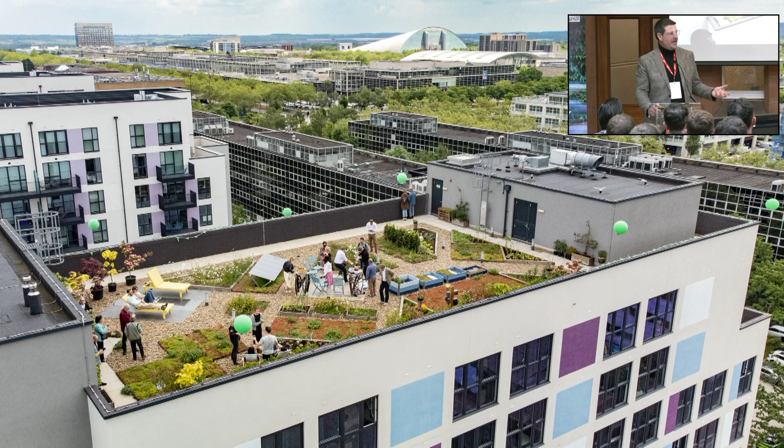In fact, in 2019, when we mapped the city centre, there's the equivalent of 6 full-size football pitches worth of space that could be greened overnight without structural enhancement. Now, that's a lot of green space when we're in a climate emergency and we need more green space. The challenge we have is bringing people on board and financing it.

So when we talk about living roofs, it is vegetation above a watertight roof surface. So if you can imagine a garden shed or a garage with a felt roof on it, that felt would still need to be there, but we're going to add some layers above it to create a green living roof. And that's really important because you still want the building to be watertight.

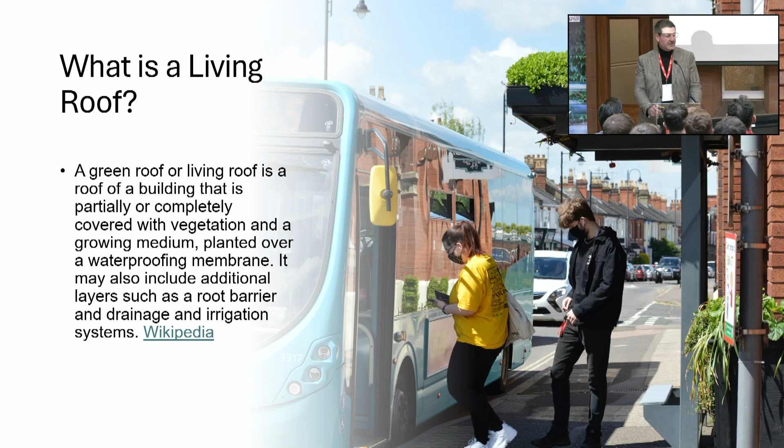Some people fear that a green roof is going to be ivy roots coming through their living room if it's on top of their house, which it's not. It is an additional layer to a surface that already exists. And it doesn't have to be big roofs, so anyone can feed into this. Anyone may resonate with some of the pictures behind that. Actually, it could be a bike store, it could be a bus stop, it could be a shed, it could be a kitchen extension, or it could be a huge factory.

The possibilities are endless, but note there as well, there's some pitched roofs and shaped roofs as well, which is doable, but it's worth noting that if you are putting green roofs on a pitch or a slope, then it's likely you're going to need to irrigate that, which could be going a little bit against what the benefits of a green roof are. But all the same, there's some very visual images there that hopefully will spark your imagination.

A very quick history lesson. Green roofs are not a new thing. The first ever depicted green roofs were the Hanging Gardens of Babylon. We then look at medieval Europe. That's when they were using sods from the footprint of a building, putting it on the roof, and obviously using that as a good tool for insulating the building.

I'll go on, but actually a key one to pick up here is the 1880s. In Berlin, they found that during the hot summers, the asphalt started to melt. So what they did there was put a sand layer on the roof to protect the asphalt from melting. And over time, that became vegetated. So it was a little bit of a rebirth of green roofs there. America, the Rockefeller Center, 1920s, money was no object. There's still a lot of green roofing, roof gardens installed in America and Canada.

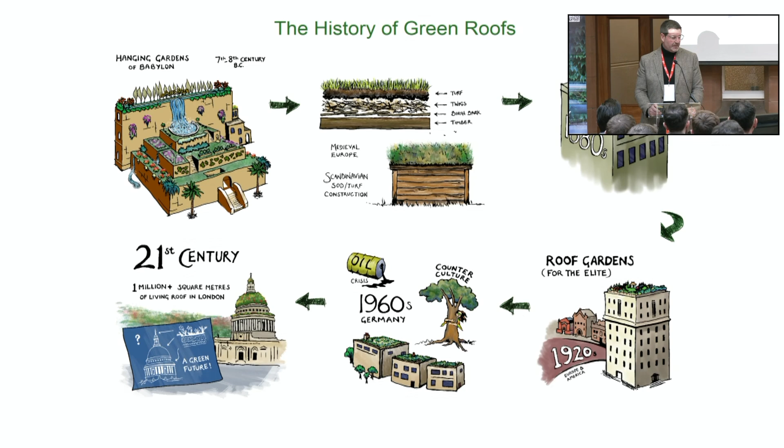Benefits of green roofs: they're not 100% of the solution to any one problem, but they are 50% of the solution to lots of different problems. Biodiversity is a big driver. Rainwater, flood reduction in our towns and cities. We can keep the water up at roof level for longer. We can slow down that flow. We can clean the air. We can capture carbon. We can actually prolong the roof life.

So going back to Berlin, where they were protecting the roof from the sun and the rain breaking down the roof membrane, we can actually prolong the roof life by up to 3 times by doing that. So there are a lot of misconceptions and arguments about why they're not a good idea, but I don't think any of those arguments really stack up when we look at the benefits of green roofs.

And often the argument is a green roof will cause leaks. It won't, or it shouldn't if it's installed correctly. The leak is probably going to be there before the green roof went on. What was probably missing is a leak test to detect if there were any leaks before it was buried.

But we can also look at roofs for different uses, so people and nature, food production, also mental health and well-being. If you're in a town or city and you're looking out onto lots of dull, grey, flat roofs, actually to look at green and see nature is going to help with our mental health and well-being. So, as you can see, lots of different benefits and lots of ways that green roofs can actually improve our towns, cities, and even smaller rooftops as well.

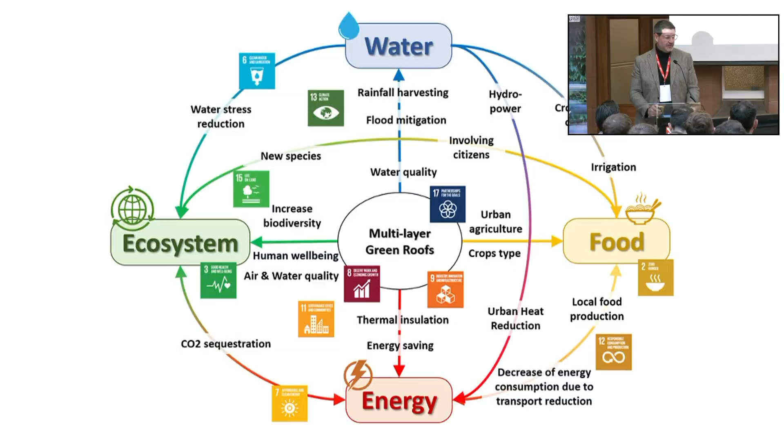Now, a common type of green roof is what they call the extensive sedum roof. This is what we call our entry-level green roof. Lots of this has gone on around the UK, Northern Ireland and Ireland, but actually we have to keep in mind that this is our entry-level green roof.

And what Queens are really good at doing is actually saying, we want to better this. We don't just want the bare minimum, we want green roofs to be performing the best they can, and the design of our green roofs to be thought out and planned in from the very beginning. And sedum is good, but it isn't great; it's not as good as wildflowers and biodiverse roofs are for pollinators. So keep in mind, this is our entry-level green roof.

The other extreme is what we call intensive green roofs or roof gardens. So this is actually recreating what you might see on the ground up on roof level. So trees, shrubs, lawns, food growing plots. And this is IKEA's store in Greenwich that we worked on back in 2019. It achieved BREEAM Outstanding and is probably one of only a handful of retail buildings that have ever achieved that in the world.

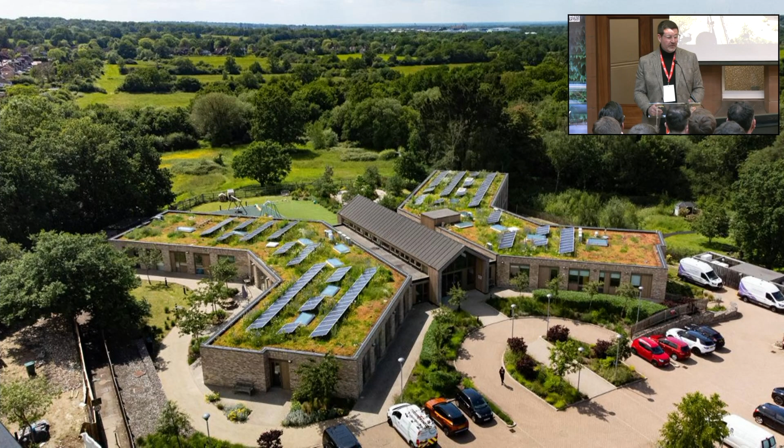This is the YMCA in Milton Keynes. This was a project where we were invited on a site tour when it was in construction, and the YMCA said we'd really love a green roof, a roof garden, but we need the funds to go towards creating the right accommodation for our young people, and we don't have the budget. And what we said is if we can ever raise the money to do it, we will retrofit a green roof, which is what we did. And it's a really great space that they use.

It's been a really good tool for raising awareness of green roofs in our city and getting people onto that roof to look down onto theirs and think, well, we can do the same. And it's created that drive. But what's really nice is that the residents use this as their own unique space. They grow fruit and veg on the roof, and they sell it downstairs in their social enterprise cafe. So it doesn't just have to be nature. What we really need to be looking at is creating spaces for both people and nature, and utilising roof space where we can.

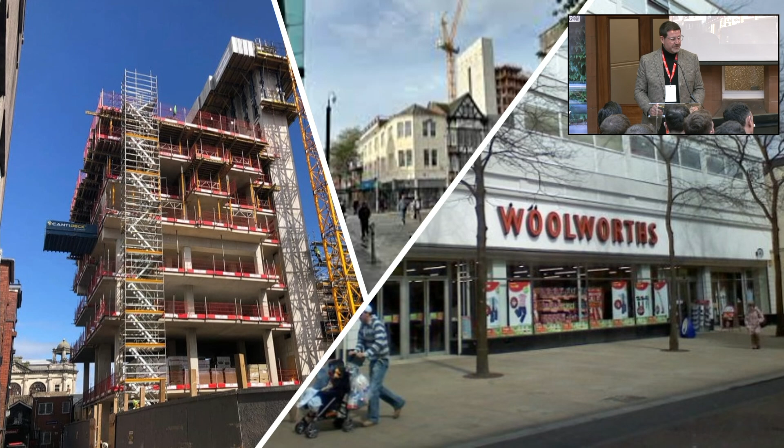This is a project down in Swansea that we're working on in Wales. If anyone's heard of the Bosco Verticale in Italy, which is all green facade, trees on balconies, this is the planned equivalent in Swansea. It's called biophilic living. It's renovating an old shop that was Woolworths on the high street, and it's by Pobl Housing Group, so it's social housing. They've put 7 stories on top, and they've retrofitted the existing building, and this is what it's going to look like.

So I'm sure you'll agree that's quite ambitious for a social housing scheme to create something so green. I think it's a really good scheme. What you'll see there is green roofs, green walls, glass houses that span 3 levels. There's lots of food growing plots as well for residents to grow their own fruit and veg and have their own green space. And each property will have their own balcony with planting on it.

Now, this can go 2 ways. The design is a great scheme, but the really important part of this is getting buy-in from the people that are going to live in it. And Pobl are going to interview everyone that's on the waiting list to move in to make sure that they understand that they need to be part of this journey to build it.

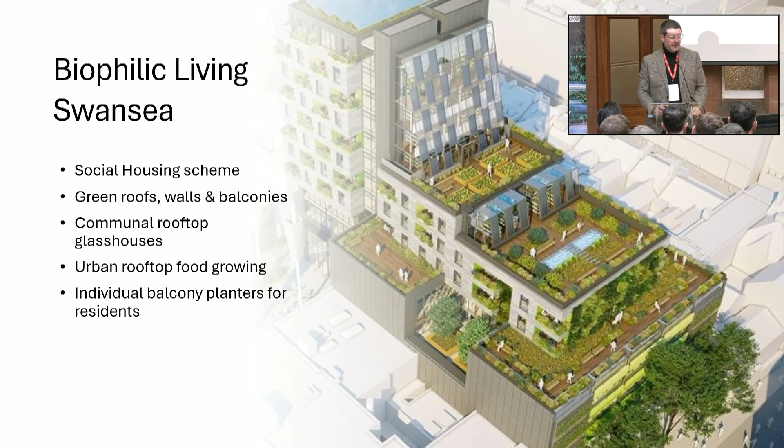So this was planned and in development way before material prices shot up, and lots of other global issues that we've got that have meant that actually this is costing a lot more than it was ever going to. But they've got to carry on with the greening scheme, and they really want to carry on with that greening scheme. But traditionally, if you come to the end of a build and you're running out of money, this is often the thing that's value engineered. It was green to start with, but it's not going to be green anymore. So it's going to be interesting, and it's well worth watching as to how this will develop. I think it will work, but it's not going to be an easy road.

So if we were to retrofit that building, we would need the assistance of engineers. We need to know that that roof can take the additional weight of a green roof. We need to leak test it as well. We need to make sure that there are no current leaks, or if we're going to replace the waterproofing, that we do it at this time. Edge protection, safety. How are we going to construct the roof safely? How are people going to access it safely to maintain it going forward? That is a huge part of this process, and a big consideration.

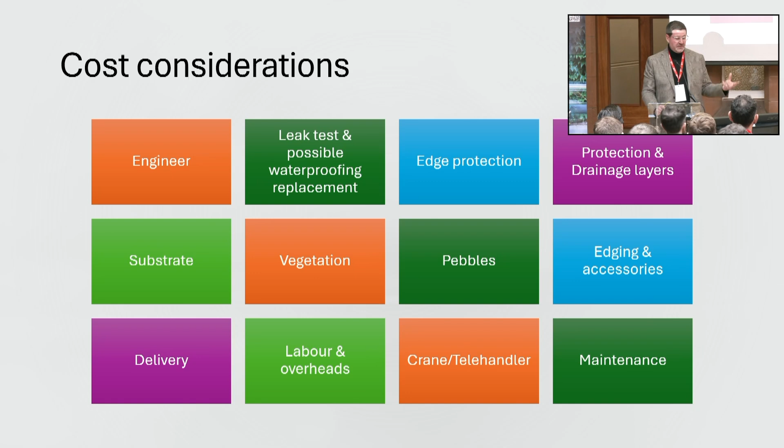A cost consideration also, well, the biggest ones are the delivery of it, the labour and overheads, and how we're going to get the stuff up to roof level. So do we need cranes in there to lift materials up? Do we need to close roads to actually build it as well? So these are all things that we need to consider when we're thinking about retrofitting a green roof.

And just as a rule of thumb, taking all those into consideration, we're probably looking at around £85 to £100 a square metre to retrofit that green space. So some people will think that's a lot of money, some will think that's quite reasonable, and actually for what we will achieve by doing it, all those benefits, I think that's actually quite a reasonable price.

If we compare those to green walls, we saw some green wall slides earlier in the day. The cost of a green wall is around £500 to £700 a square metre, so that's quite a big difference between green roofs and green walls. Also, maintenance is a lot cheaper on a green roof. It's around 2 or 3 maintenance visits a year.

A green wall is going to need a lot of intervention. After a number of years, you're likely to have to replace most of that vegetation because it's such small root zones that the plants are growing into. These green roofs should actually last as long as the building and won't need that continued replanting program or continued irrigation like a green wall will.

So my top tips, if you're going to do a green roof, if it's something small in your domestic environment, if it's part of the university, if it's a shed, if it's a student accommodation block, a new building, then the key top tips are the structural assessment, making sure it's strong enough, but actually finding out how much a good green roof is going to weigh, and work with your engineer to make sure that's designed in. Don't just go for the basic, let's aim higher.

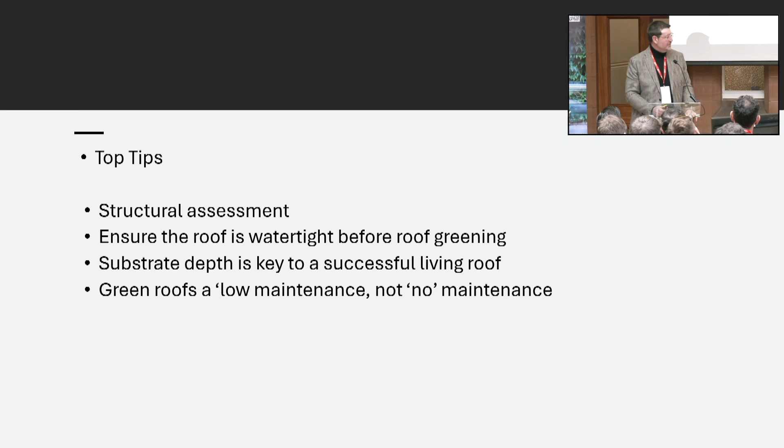And then substrate depth, that's your growing medium. That's the key and the real success to a good green roof. As much as you can within the weight constraints of a building, get that substrate on, because that's how it's going to be the most sustainable for you. And then just remember that green roofs are low maintenance, not no maintenance, which is a very common misconception.

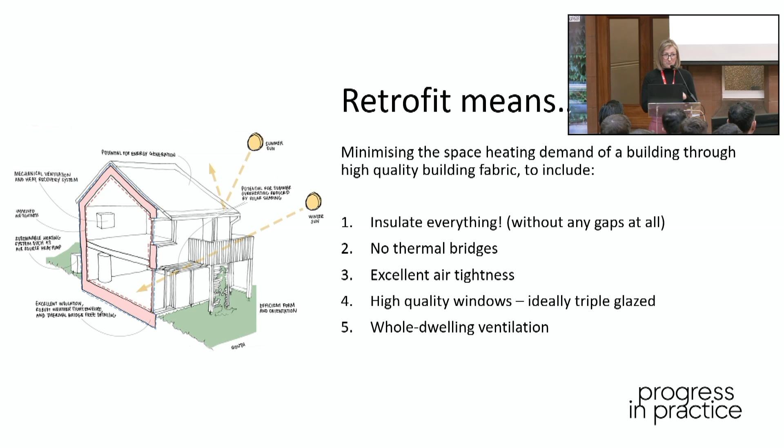I guess the question might be why retrofit? There you go, why retrofit? So the big 3 are obviously carbon, as we've talked about quite a lot today. But the other 2 are really significant in terms of our experiences of the buildings, but also they're really good selling points. So if you're trying to convince a client or a customer that they should be going the extra mile and going to the next level in terms of retrofit, really emphasising the level of comfort that you can achieve through a properly retrofitted certified building and the impact on people's health can be a real selling point.

We obviously know that we're in a climate crisis. We know that we need to minimise carbon emissions, but the issues go much, much deeper than this. Our building stocks, our housing stock in particular, they're centuries old, decades old maybe, but it's not created for this point in time, basically. We've got drafty buildings, we've got damp buildings, we've got roofs that are failing. So we've got a whole set of maintenance measures that need to be done anyway.

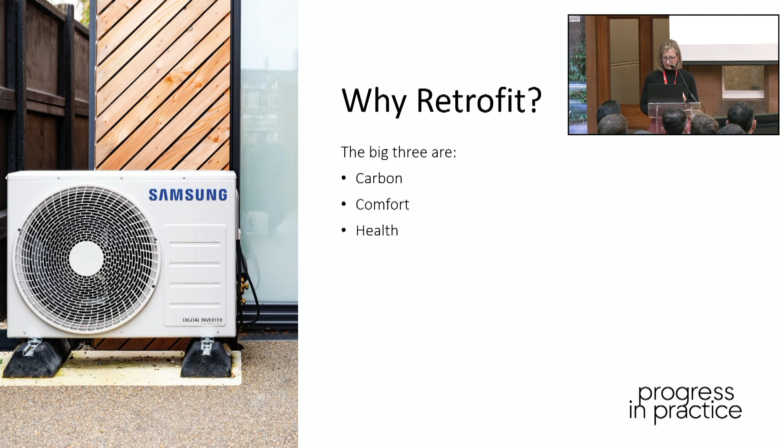And whilst at this point in time, we know, in this room probably, we have the skills to be able to build a very, very low energy, very comfortable building, our housing is not up to that standard. It's last century's housing, so we need to do something about it, regardless of carbon. But, you know, it's as good a reason as any.

So this is a genuine news article from the BBC, the Northern Ireland BBC, which kind of drills home this requirement to retrofit. We're in 2025, and we have news articles which talk about the physical and the emotional, you know, mental impact of energy price rises. We've got a housing stock that's not meeting our requirements,

and yet, and this is pinched from Rachel Owens from the National Retrofit Hub, there was a Which survey conducted, I think, in 2023, where they found that 46% of people living in the UK believe that their homes do not require upgrading in terms of insulation and energy. So actually, we don't know what we're missing. We don't realise that we need to retrofit. So there's quite a big question about how you reach those people.

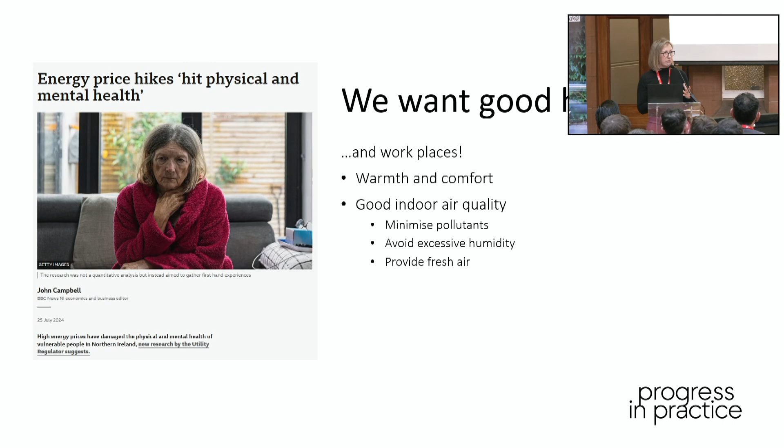And the reason that we want to go down the route of certification is to make sure that we build in quality assurance. And if anyone is ever thinking about doing a large-scale retrofit, you need to look at that project first to fully understand what the risks of a poor retrofit are.

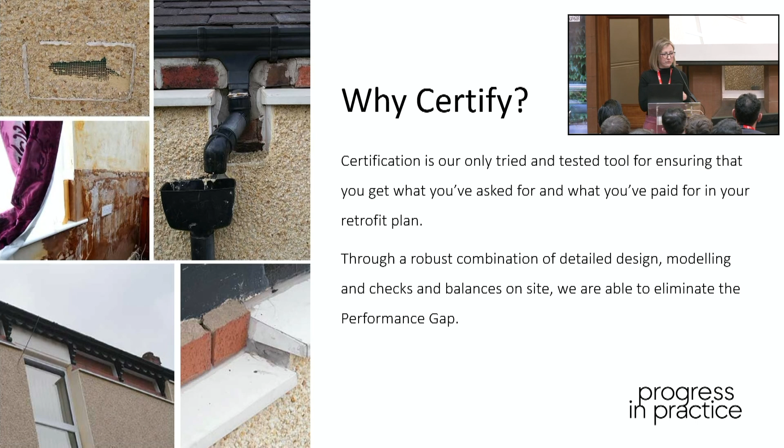So in reality, there are two issues with that. One is that we're not hitting our energy demand targets. And the other is that if you're delivering a building that is that poor in quality, that's missing the targets so badly, you are building in risks in terms of the thermal bridging, the moisture risks in retrofit. These are figures for new build. I'm not sure of the data for retrofit. I'm assuming it's probably much worse.

I think there's 2.17 million retrofits that have been carried out in the UK. 2.1 of them are by Eco. Of that, 35% were boiler upgrades, which means that probably the rest of those are loft insulation and, I'm guessing, maybe insulated plasterboard, dot and dab insulated plasterboard. And if you don't know what's wrong with insulated dot and dab plasterboard, then definitely talk to me after this, and I'll run you through it.

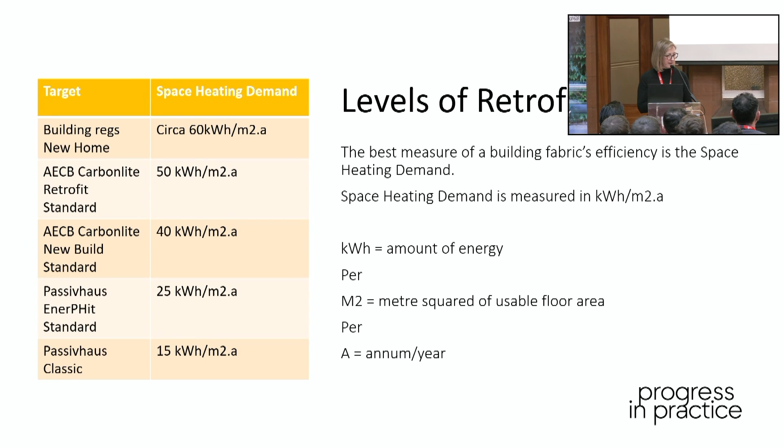But these standards are measured using space heating demand. And the space heating demand is a metric that we should all know. It should be as familiar to us as miles per gallon. It should be that ubiquitous. And when we're talking about the energy efficiency of a building, if we're not talking about space heating demand, what really are we talking about? So it's the amount of energy that you use to heat a metre square of your building per year. So it gives us a kind of a language that describes the efficiency, and it means we're able to compare apples with apples, I guess. So again, the AECB Carbonlite retrofit standard is practically achievable for most buildings.

So coming back to process and how we build in that quality, whether you're aiming for Passive House or whether you're aiming for the AECB standard, it's pretty much the same thing in terms of process. So we start off the project by getting to know the building as much as possible. We get as many relevant surveys as possible. We manage risk. We do moisture risk assessments. We work out the condition of the existing building so that we don't get surprises later, but also so that we can tailor any retrofit measures that we propose to that building. So, for example, you'll have a different approach if you're dealing with a 1960s cavity wall construction compared with solid masonry. So any good retrofit should start with a retrofit assessment.

The next stage of the process is to design your retrofit strategy. That should include modelling your building in PHPP. So you can't really know what your building can achieve without modelling it in PHPP. You can have a good guess. You can look at the geometry. You can work out from the orientation, the design of the glazing, roughly what the biggest challenges are going to be. But unless you've modelled it in PHPP, you won't know what's the most achievable.

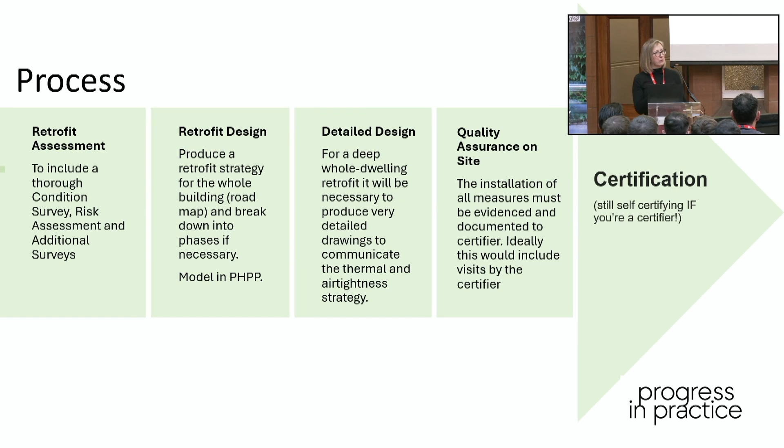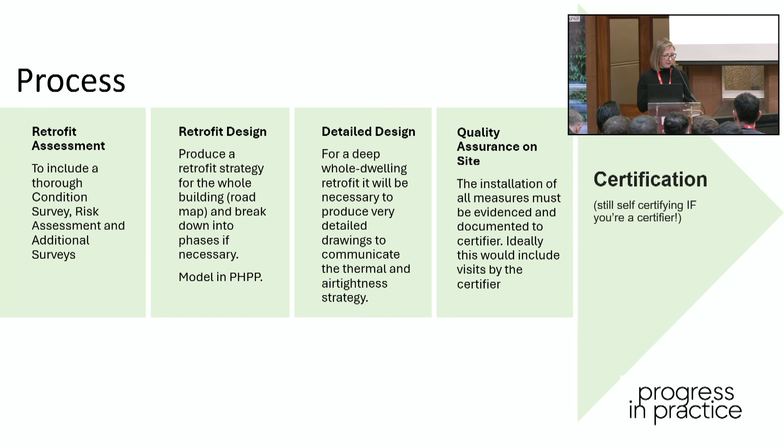But again, all of this information, the commissioning of your ventilation, all of that goes into one package. And if it's an AECB project, you can work with an AECB certifier who self-certifies that. So it's a slightly less drawn-out process. It's supposed to be slightly more affordable. And it should be simpler in theory. It's the same level of verification, though, or quality assurance, let's say.

And some examples of Carbonlite projects. This is obviously not my project, and that is not me. But this is Ed Dimmock, who presented at the AECB conference last year. It's the biggest AECB certified project that we have so far. It's 91 flats. And what's interesting about it is that it started off life as a failed retrofit. So the tower block was clad, it went badly, pieces of the insulation started falling off on people. So the whole building needed to be shut down, stripped, and started again. But now they've turned these 91 flats into very low energy, comfortable homes for people. And I'm not sure when it's due to be complete, but it's soon.

On the other end of the scale, and this is probably the smallest project that you'll see today, and I think it might be one of the smallest certified AECB Carbonlite retrofit projects. It's one of ours, and just for clarity, it's much harder to do really small projects. It's harder to do when they're an east-west detached bungalow. That's all of the criteria to make something really, really hard to meet the Passive House standards. So with this project, we did all of that, the survey information, the conditions survey, modelled it in PHPP, found out that actually it's not achievable. We can't get it to be Passive House because everything is working against it. So instead, we decided to target the AECB standards.

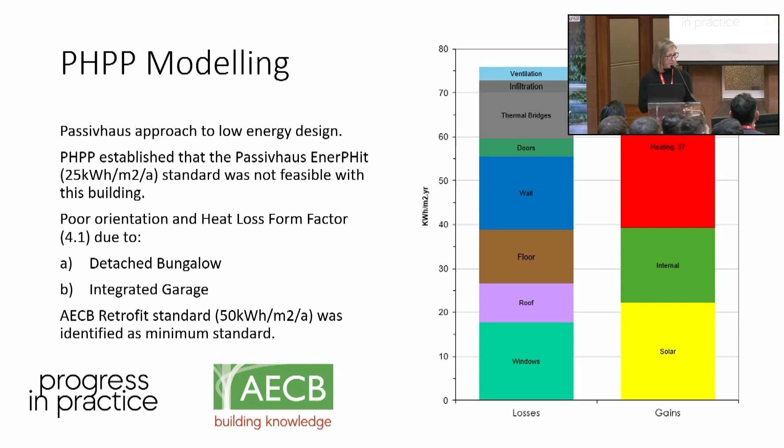So the target space heating demand ended up at 37. So that's quite a lot better than the AECB retrofit standard, but quite a lot worse than Passive House EnerPHit standard. And that was based on installing measures that were appropriate to the building. So we filled the cavities, we put on EWI, and it got to a certain level that felt like a kind of reasonable level to be aiming at.

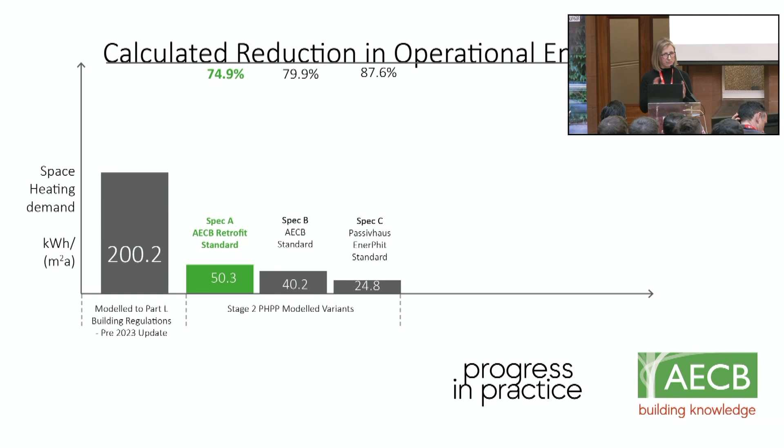So that's how it compares to the base case, which is the building as existing. So it's, what is that, a 75% reduction already? So in terms of operational energy, it's doing great. And to do that, and I'm just going to whiz through these because I'm aware of time, I kind of hit on insulation and thermal bridge-free detailing. This is how that's achieved.

So the key areas that we were watching out for were the base of the wall, making sure that we went down past the DPC to make sure we mitigated that thermal bridge because we couldn't eliminate it. And then introducing insulation at the eaves to make sure we joined on to the wall insulation. That insulation around the windows then wraps the front of the windows to make sure that's one continuous blanket that just envelops the whole of the building.

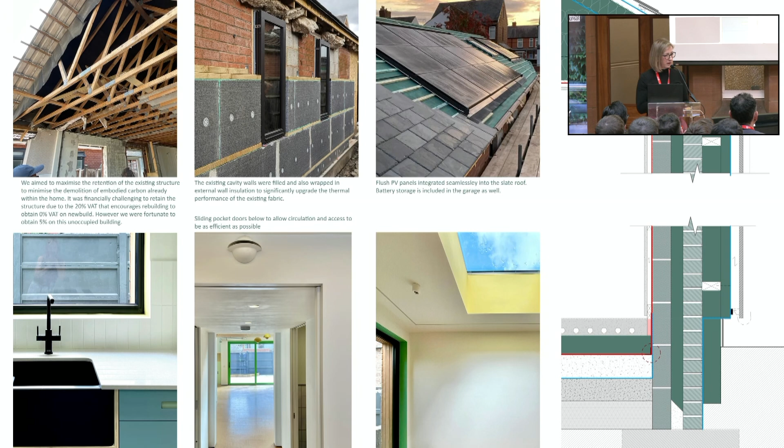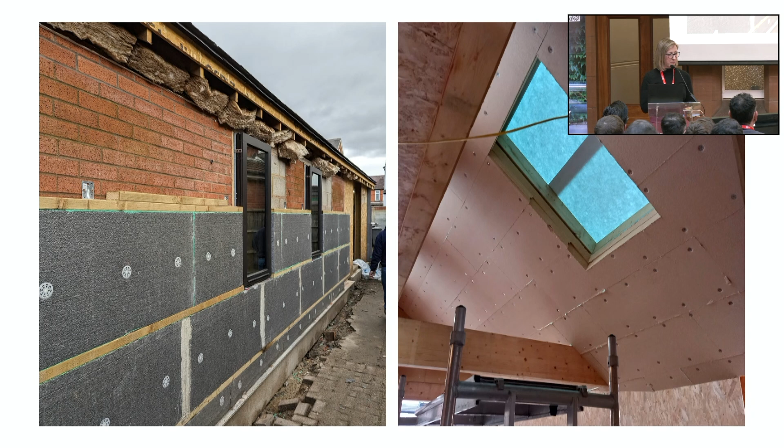And the same with the air tightness there. So you can see the practical application of some of that. We tried to use as low carbon materials as possible, but the client was quite keen to have an EPS insulation on the outside of the building. And again, the air tightness, achieving a really low air tightness, you need to detail that in. So having one continuous red line for your air tightness that goes around your section and completely envelops the building is really, really important. And that's what that looks like.

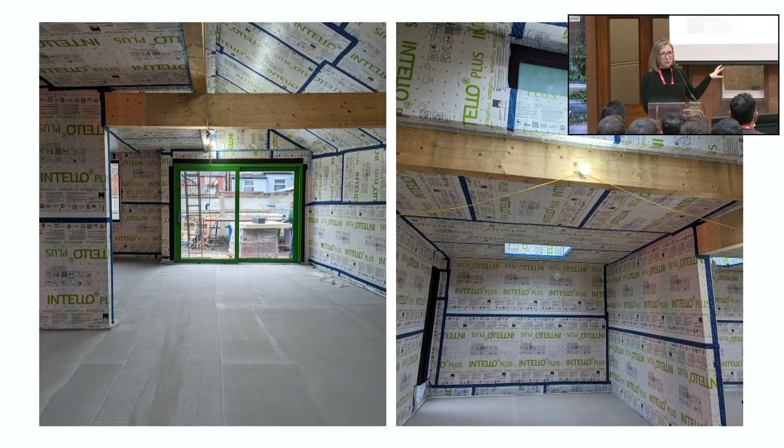That's a very well-wrapped building, to the point where it actually exceeded the expectations of the project teams who were aiming for below 2, and because the builder was just so enthusiastic about airtightness, we managed to get it down to below 0.6, which saved the client another £200 per year on heating. So you don't have to aim for the very worst case in terms of each standard. There's always a benefit to going further, especially if it doesn't actually involve any additional material or work.

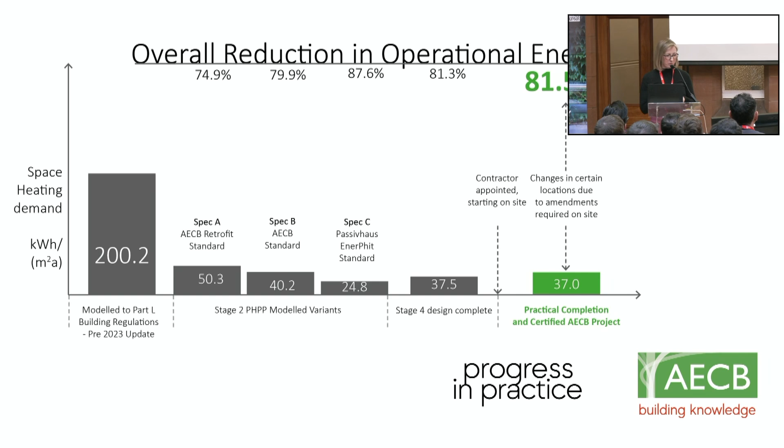So the additional savings meant that we were aiming for 37 kilowatt hours per metre square per year, which was an 82% reduction in terms of operational energy. And what you get at the end of it is this lovely certificate. And unlike the Passive House certificates, what you get is a summary of your air tightness, of your space heating demand, and of your summer comfort, so your overheating risk. So that actually gives a bit of value to the things that you've done extra.

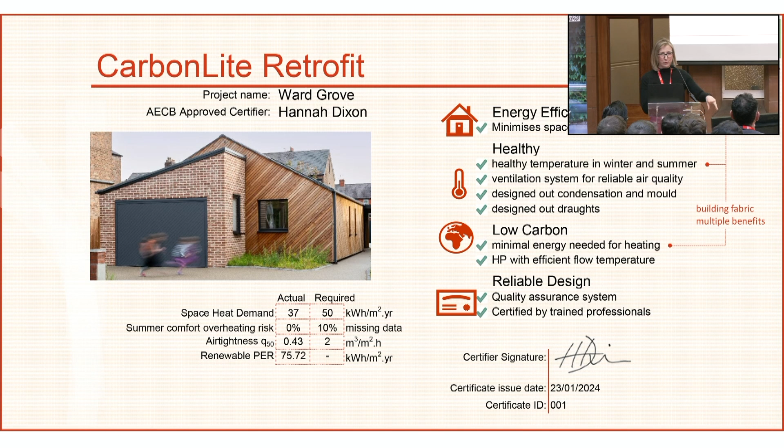So we can say this is an AECB CarbonLite retrofit, but look at its score, it's even better. And that's some pictures. You can also make it a bit pretty, which is lovely. And that's it.

Do you want to join the panel discussion? So thank you very much to Hannah. Some really interesting examples there at various different scales of how we can apply standards. So can I ask our other panellists now to join Hannah on the stage? So Chris, if you'd like to join Hannah, and also two colleagues from the School of Natural and Built Environment here at Queen's, Dr Clare Mulholland and Dr Neil Galway.

Clare is a senior lecturer in architecture in the School of Natural and Built Environment. As a chartered architect, Clare's research focuses on city planning, architectural design, intergroup contact in divided societies, spatial practices, socio-spatial integration, and community participation in the design process. Clare's teaching practice focuses on architecture, design, technology and environment, and the climate crisis in relation to design process and specification. Clare has worked in high-profile architectural practices in London and Belfast, where she's designed diverse projects across the commercial, educational and community sectors.

Dr Neil Galway is a chartered urban planner with a PhD in planning focused on heritage reconstruction, memory and identity. He is the Director of MSc programmes in City Planning and Design and Planning and Development at Queen's, here in Belfast. Neil supervises PhD researchers on visual impairment and the built environment, green infrastructure and child-friendly planning. So thank you, Clare and Neil, for joining us today, and Hannah and Chris for contributing to the discussion.